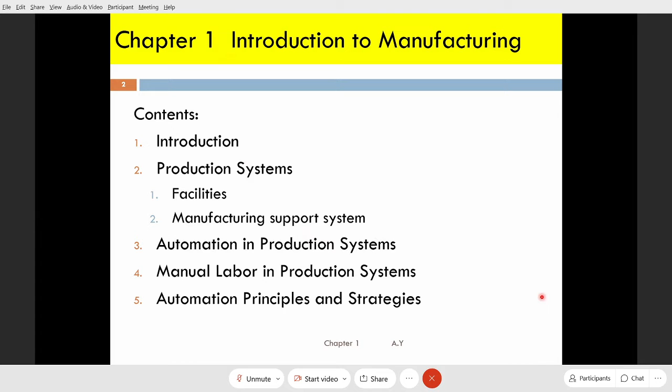So these are realities of modern manufacturing. First one is globalization. Countries especially China, India, Mexico, before underdeveloped, now become the major players in manufacturing. One reason why these countries become major players in manufacturing is because of the labor costs. They have cheap labor costs. That's why they now become major players in manufacturing.

And number 2, international outsourcing. Parts and products once made by local company now been made offshore, overseas or near shore. Example here is Japan. You know that in Japan, the cost of labor is very expensive. So they will use international outsourcing.

Local outsourcing, use of suppliers within the country to provide parts and services. Example is Proton, Perodua. They have suppliers within the country, so they can provide the parts and services.

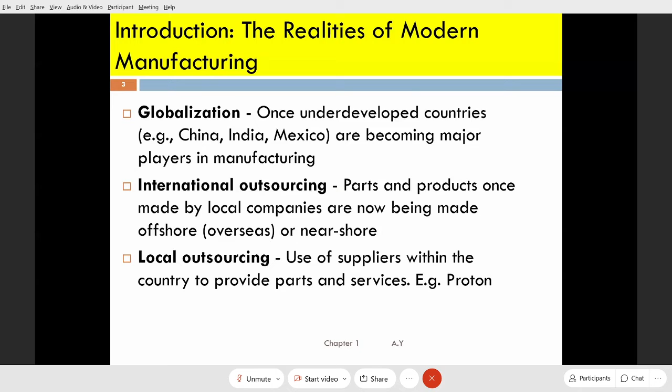And then contract manufacturing. Companies that specialize in manufacturing entire products, not just parts, under contract to other companies. Same as Proton and Geely example earlier.

And quality expectation - now we want products with high quality, demanding products of the highest quality. And the next one, the last one, is a need for operational efficiency. Manufacturers must be efficient in their operation to overcome the labor cost advantage of international competitors. So our manufacturing process must be efficient.

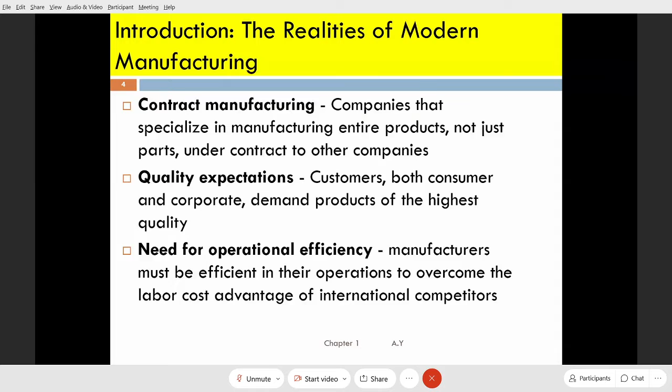So these are the 6 realities of modern manufacturing. And this one is modern manufacturing approaches and technologies.

So for automation, with automated equipment instead of labor, we compensate the disadvantage of labor costs, especially in Japan where the labor cost is very high. So they can compensate the labor cost disadvantage. With automation, we can reduce labor costs, we can reduce production time, and if we can reduce this labor cost and production time, we can increase our product quality.

So that's automation. And second one is material handling technologies. This involves a sequence of activities, transferring your product from one workstation to another. Because manufacturing usually involves a sequence of activities - you know that in manufacturing technology, to make a product we have a sequence of processes.

Number 3, manufacturing system, where we integrate and coordinate multiple automated or manual workstations. Example here, if we have a production line, this production line will have a series of workstations, and all these workstations will be coordinated and integrated using CIM, computer integrated manufacturing.

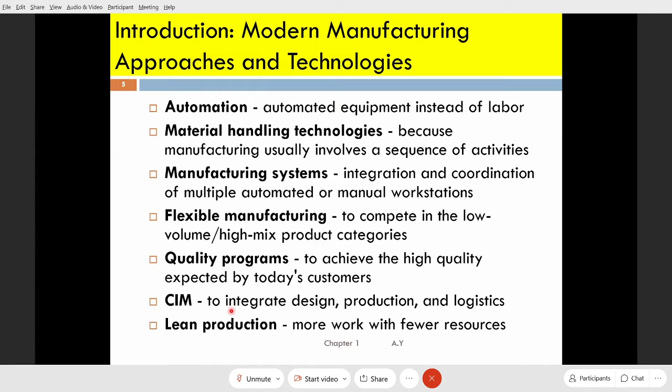So far okay? I think it's okay. This is easy, I hope.

And then the next one is a definition for production system. Production system is a collection of people. People here can be referred to as direct labor people, or blue collar workers. Blue collar workers or direct labor people are persons or personnel that operate the facilities, for example technicians and operators.

And then the second one is professional staff people, or you call them white collar workers. This is the person responsible for the manufacturing support system, for example engineers, plant managers.

The equipment is your machine and procedures organized to accomplish manufacturing operations of a company. Procedures can include Taguchi method, quality control, or group technology (GT), which is how you organize your machines. So this is the definition for a production system.

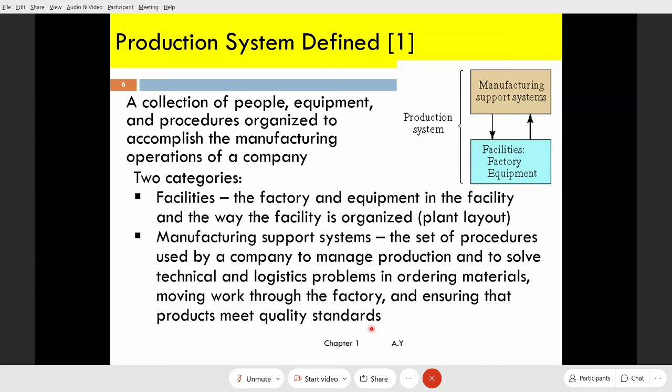Facilities include the factory, machines, tooling, material handling equipment such as AGV (automated guided vehicle), and inspection equipment, which can be vision machines, as well as computer systems that control the manufacturing operation.

Plant layout is the way equipment is physically arranged in the factory. A manufacturing system is the logical grouping of equipment and workers in the factory - how you arrange them either in a production line or as standalone workstations and workers.

A production line can be arranged in a loop or in a U-shape.

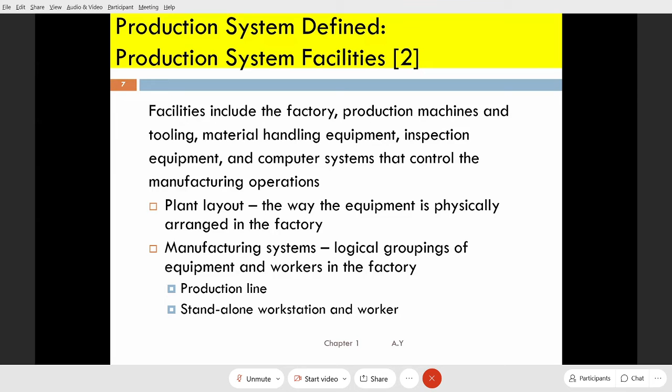There are three categories of how we define human participation in the process. The first is the manual work system: a worker performing one or more tasks without the aid of power tools, but sometimes using hand tools. This uses raw material as the starting work unit for the process.

For example, let's say the process is related to quality. How do you check the quality? Maybe you check the diameter using a micrometer. This is for manual work only.

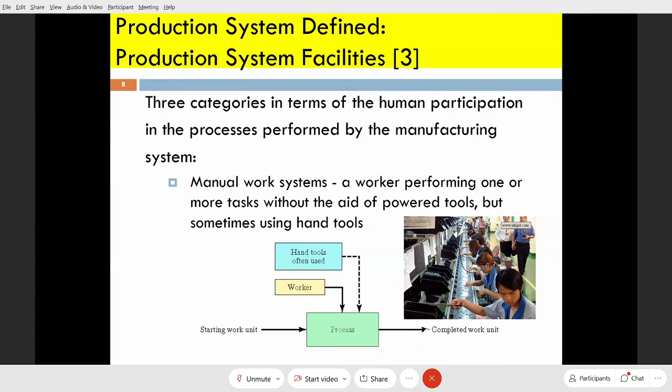The next one is the worker-machine system, where a worker operates powered equipment. For example, how this worker assembles automotive parts using powered equipment.

Or maybe we have a production line consisting of many workstations, and each workstation has a machine. This machine can be a manual machine, for example a lathe machine, which requires a human to operate it. This is the worker-machine system - a worker operating powered equipment.

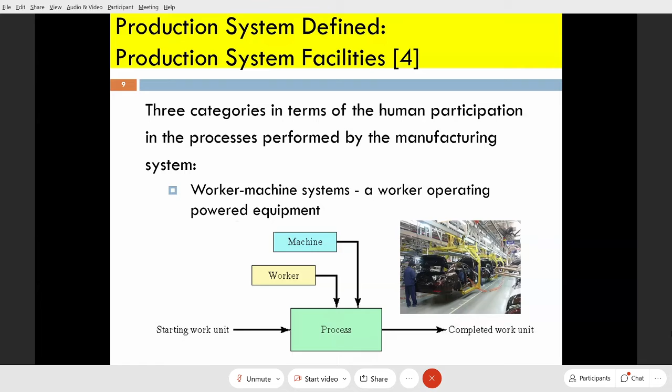Number three is the automated system: a process performed by a machine without direct participation of a human. This can be fully automated or semi-automated. In fully automated systems, the human just monitors the process. For example, with many workstations - station 1, 2, 3, 4 - each station is monitored by its master control.

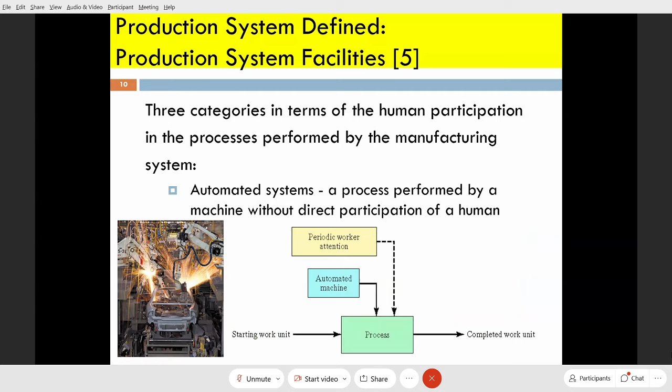This next topic is the manufacturing support system, which consists of four functions: business function, product design, manufacturing planning, and manufacturing control.

The business function is how you communicate with your customer - that's why we have customer orders here. The business function is the beginning and end of the information in this process. Receiving information here refers to customer requirements and customer specifications.

Once you get your customer order, you pass information to your product design. For the design, you design your product based on your customer order. So information goes to your manufacturing planning, and then once you transfer this, you must communicate your production system facilities to make sure that when you design a product, your facilities are able to produce that product.

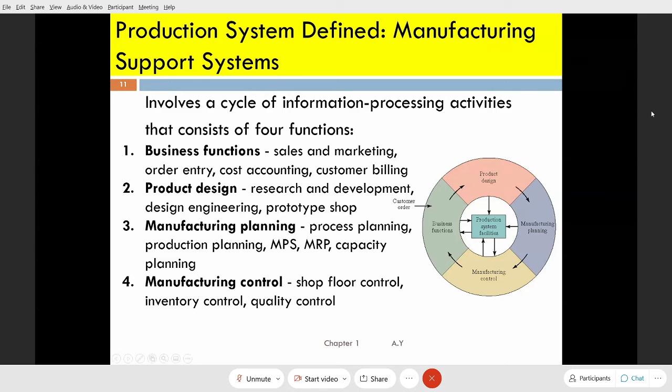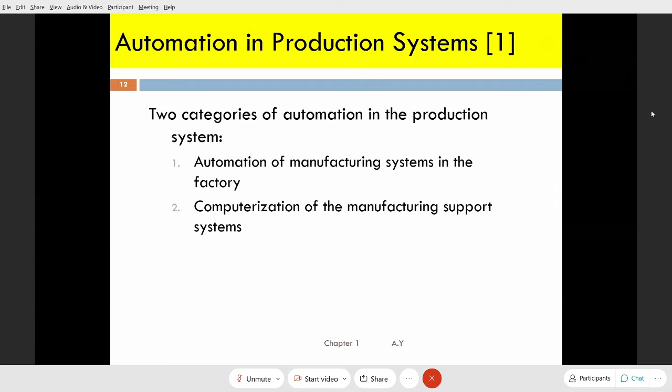So there are two categories of automation in production systems: automation of the manufacturing system in the factory, and computerization of the manufacturing support system. These two categories overlap and are connected to the factory manufacturing system using computer integrated manufacturing, CIM.

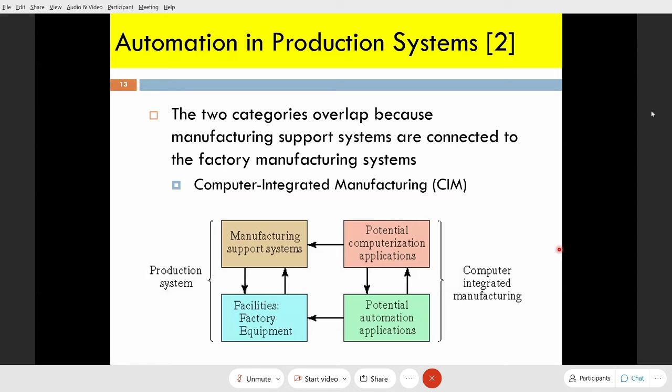This is an example of an automated manufacturing system - for example automated machine tools, transfer lines, assembly, industrial robots, automated material handling and storage, and automatic inspection systems for quality control.

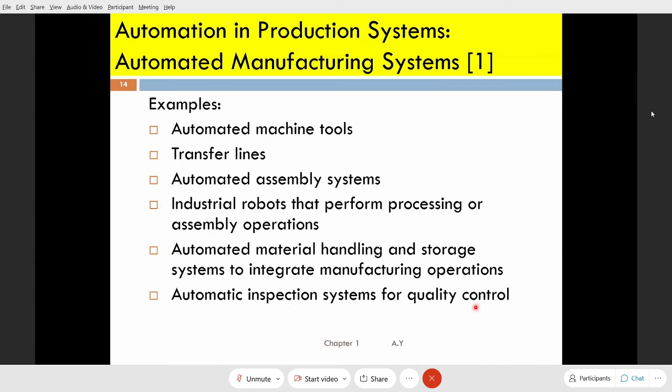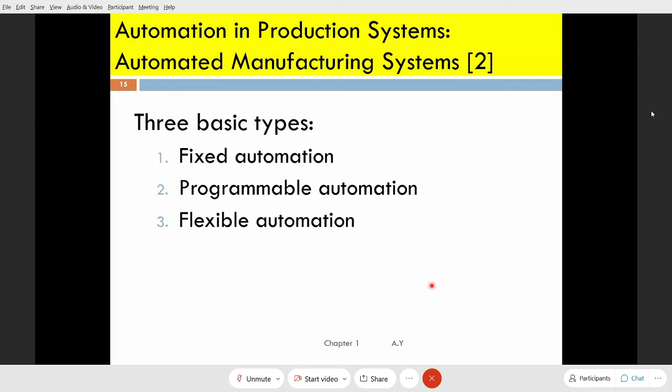This slide shows the basic types of automated manufacturing systems: fixed automation, programmable automation, and flexible automation.

For fixed automation, the sequence of processing operation is fixed by the equipment configuration. Its features are suitable for high production quantities, high initial investment, high production rates, and it's inflexible in accommodating product variety. So fixed automation only produces a simple or single product, but in high quantity.

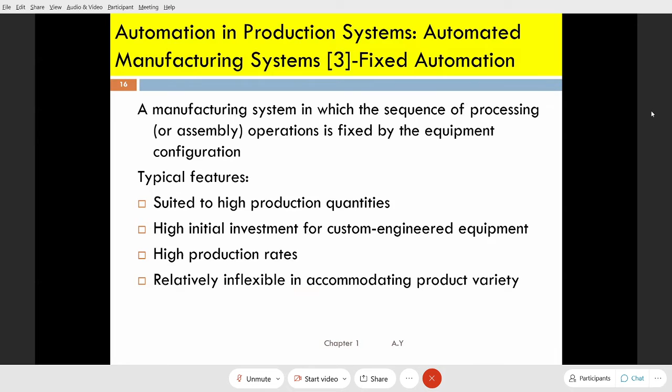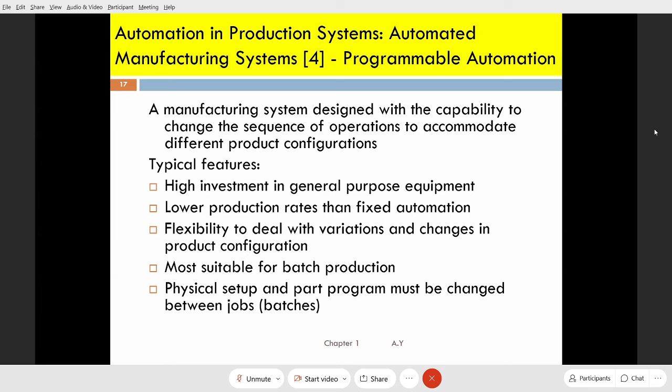This is programmable automation. The third one is flexible automation - an extension of programmable automation in which the system is capable of changing over from one job to the next with no lost time between jobs. So for flexible automation, you don't need to reconfigure your workstation, compared with programmable automation.

You need to reconfigure your workstation for this one, but this other one, you don't need to reconfigure.

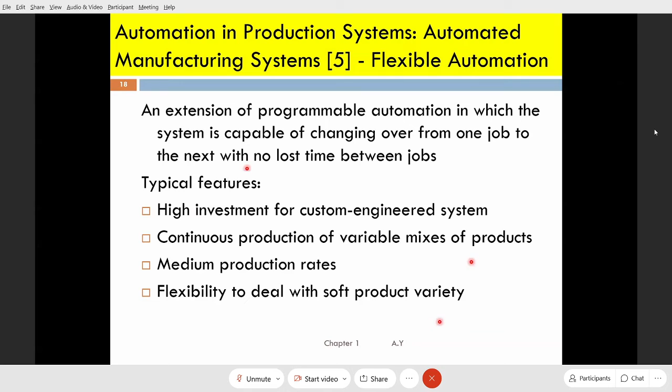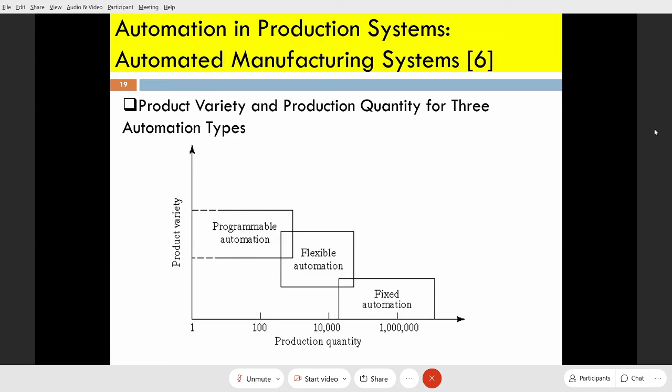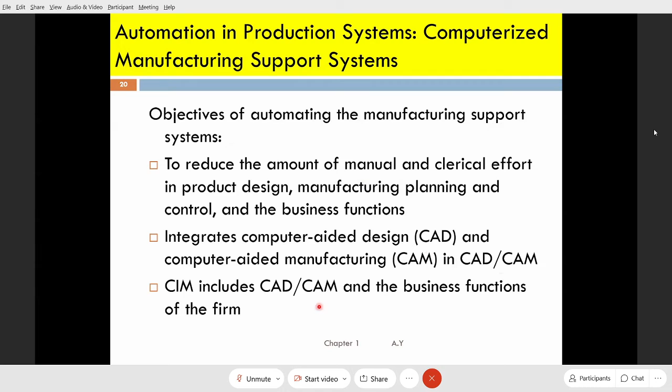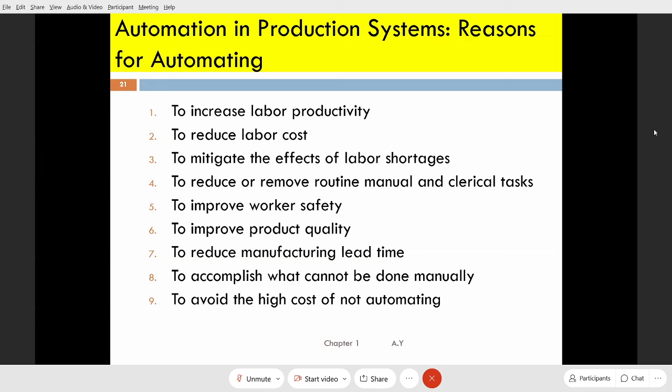Number 9 is to avoid the high cost of not automating. If all companies have done automation and you are still manual, your production will fall compared with others. So this is to avoid the high cost of not automating.

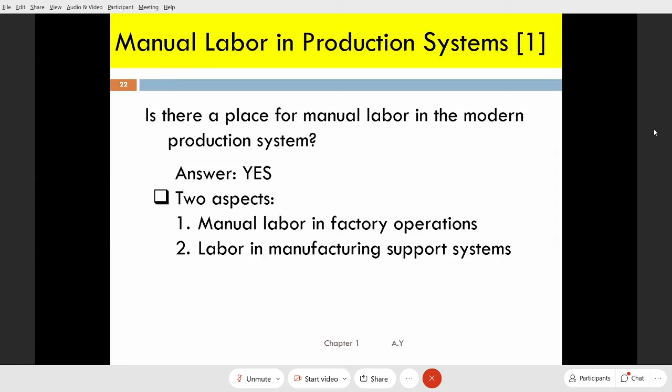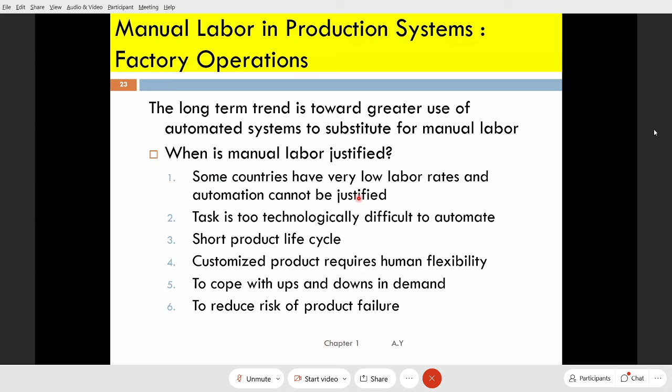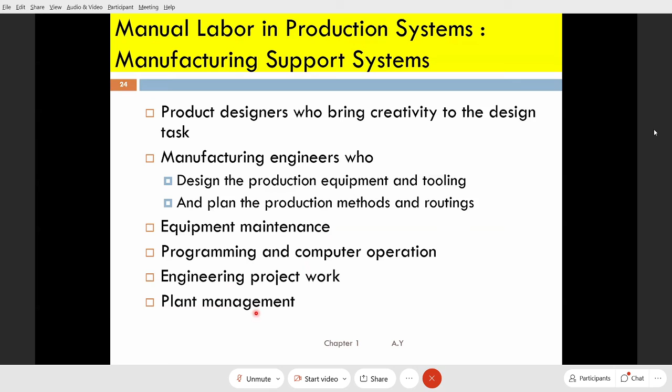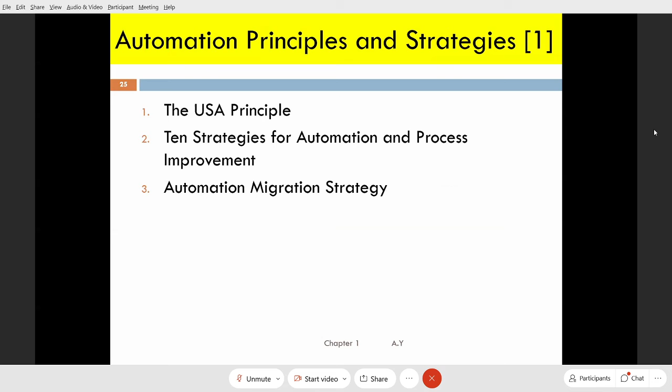This one is automation principle and strategies. So you use the USA principle. We have 10 strategies. And then the third one is automation migration strategies.

USA here is understand, simplify, automate. You understand your output, input, value chain analysis, and then if possible you simplify your process, reduce unnecessary steps and moves. Then the third one, if possible, you automate the process.

So there are 10 strategies for how you go from manual to automation. It's called automation migration strategy.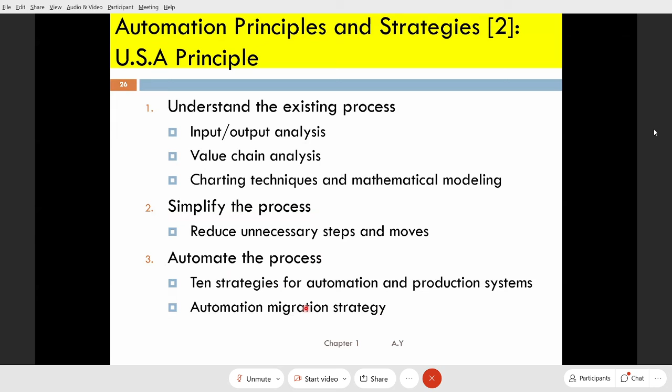Strategies for automation: process improvement, specialization of operation, combine operation if possible. You want to combine in one workstation, so we combine operation, so we can reduce the number of machines.

Simultaneous operations: two or more processing or assembly operations performed simultaneously. This way, you can reduce your processing time.

Integration of operations: how you link workstations, many workstations into a single integrated mechanism, or your work handling devices, how you transfer your parts between workstations.

Increase flexibility: you increase your utilization of equipment. This involves flexible automation, so if you increase flexibility, you can involve flexible automation.

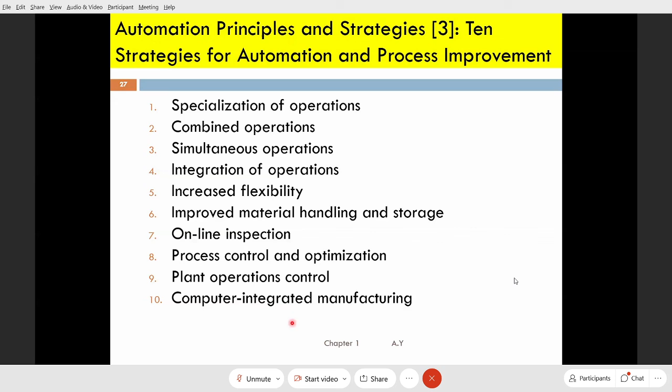This one is automation migration. Phase 1, manual production. Everything is manual, single station, manned cell. This is your cell 1, 2, 3, your new workstation. Everything is manual, even the transfer of your parts is manual handling.

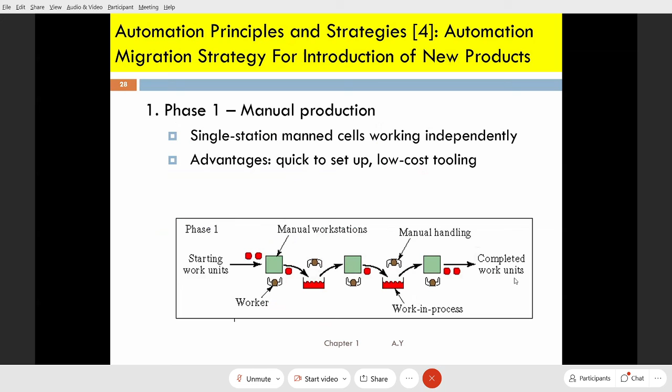Advantages here: quick to set up, low cost tooling. So once your product is stable, you go to automated.

Phase 2, automated production: single station automated cell, independently. So the transfer of your product is manual, but your process is automated.

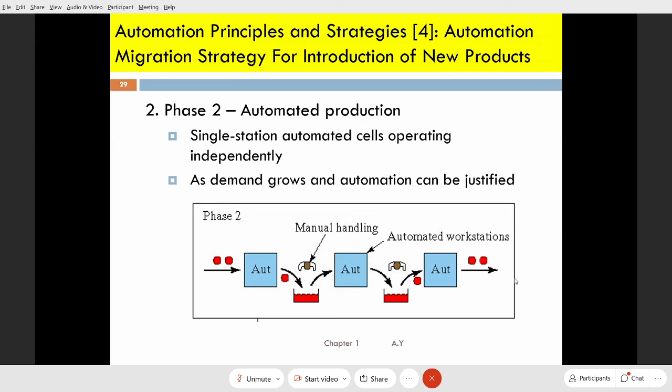Automated production. And phase 3, automated integrated production, is everything automated.

So this is the automation migration strategy. You can see, based on your product demand, in the early stage you still use manual. As business product demand increases, you use phase 2, which is automated production. And as it increases further, you use automated integrated production. So this is how you migrate from manual to fully automated.

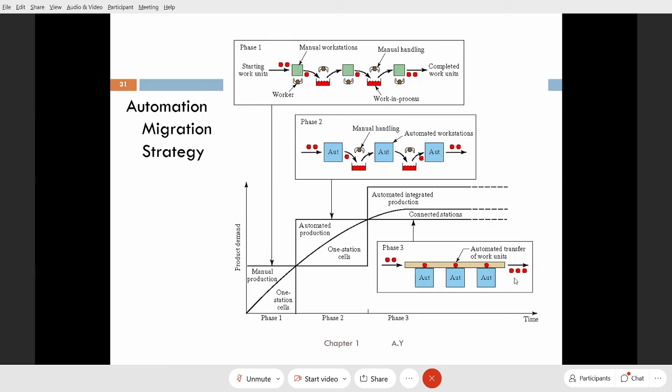The advantage of automation migration strategy is the introduction of new products in the shortest time, so automation is increased gradually based on your product demand. This avoids the commitment to a high level of automation from the start for new product demand, because we don't know if your product demand is unpredictable.

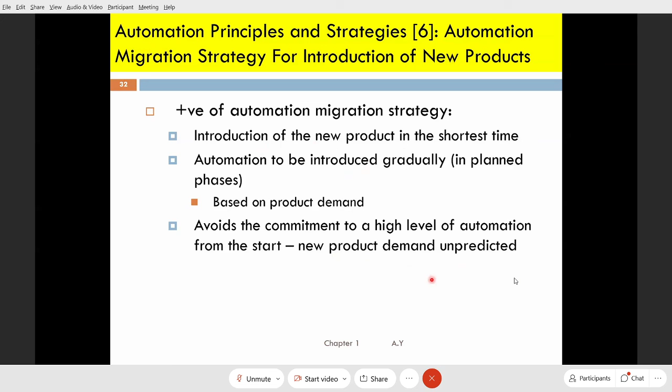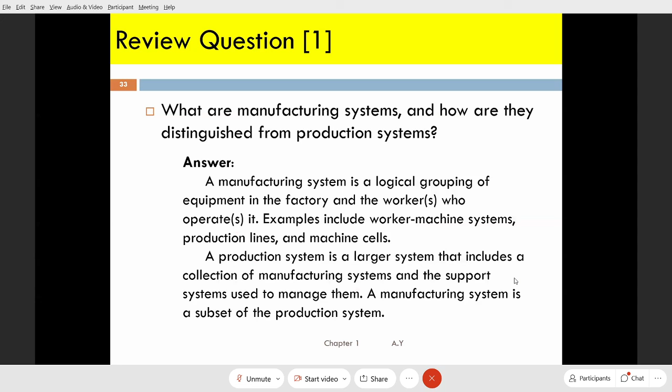So what is a manufacturing system? How is it distinguished from a production system? It's a logical group of equipment, everything within it. And then, do we need workers, humans? Humans are needed in the plant, for example in maintenance, programming, plant operations.

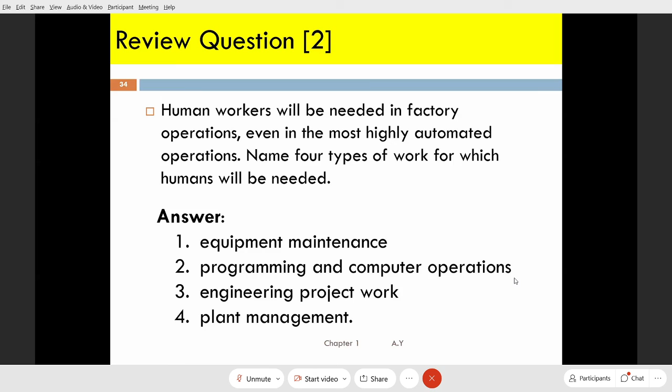And then, what is automation migration strategy? It is a formalized plan to evolve the manufacturing system used to produce new products as demand grows.